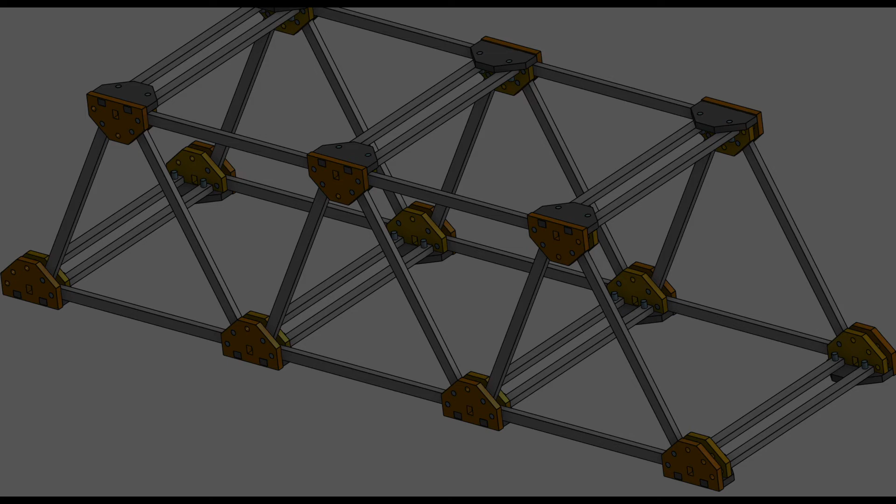In this tutorial, we're going to complete and assemble the first side of our Warren truss and put our horizontal members in as well.

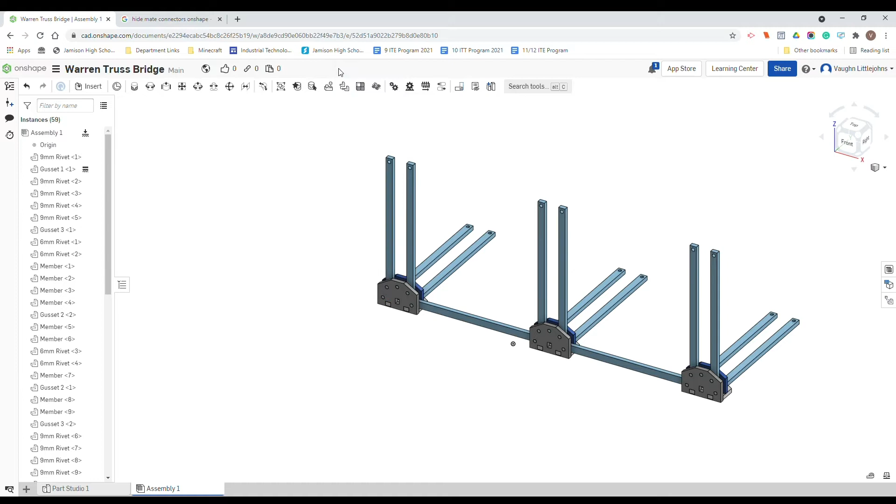So what we're going to do is hide these end pieces here, and we don't need these pieces as well, so we're just going to hide them. Remember, you can select all of them by left clicking and then right click hide.

So we're going to use this and copy it, and that's going to become the top part of our bridge. Highlight, Control C, click off it, then move my mouse up in this direction, Control V.

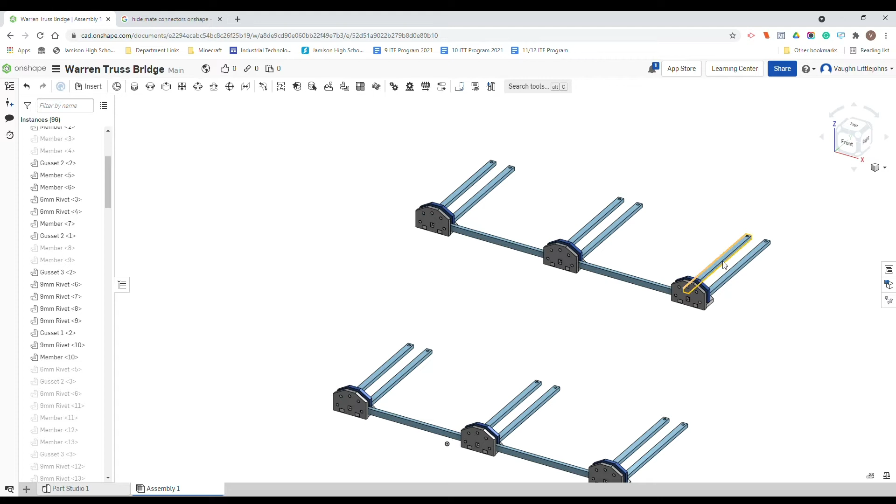So what we're going to do then is just unhide everything in a minute, but first we're just going to rotate. If we highlight our component of the bridge, we just need to flip this upside down. The easiest way is to go to the front view so you can see this, and we're just going to go to 180 degrees, and that is directly.

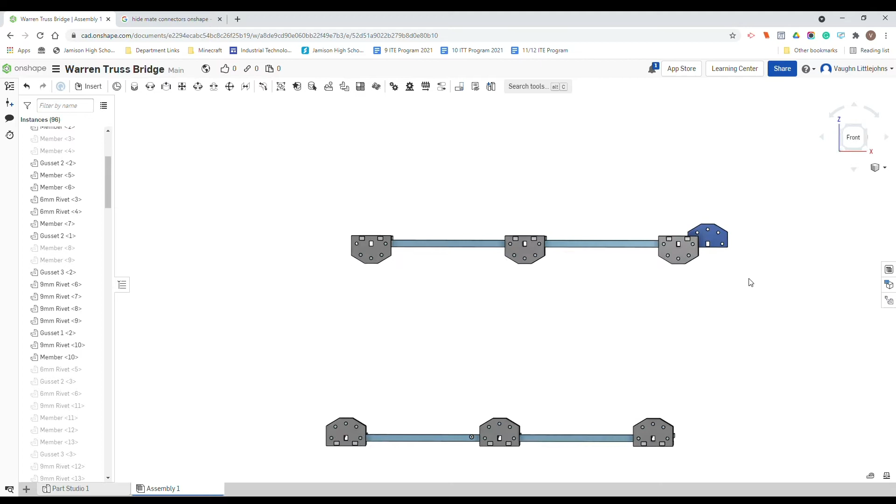Now this one has not flipped, let's have a look. That happens to you, no problem, it's an easy fix. We'll grab that one and check if there are any joints that are broken, which there isn't, meaning this piece probably isn't actually attached to anything.

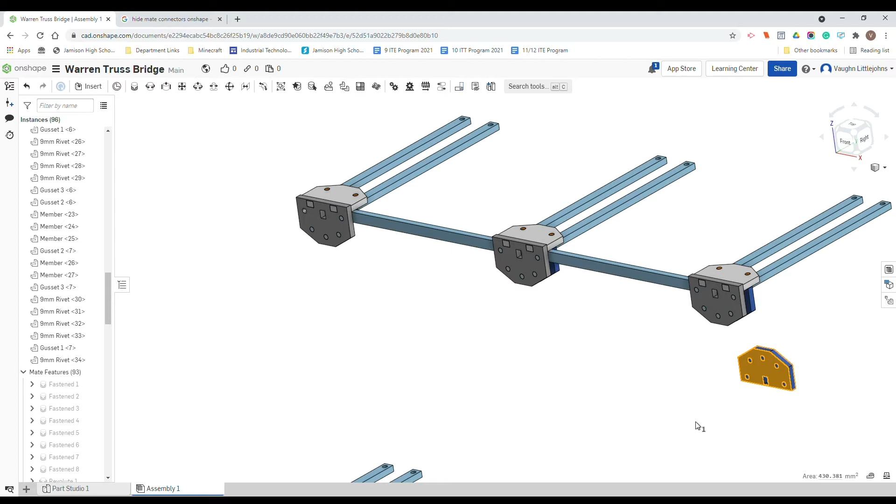So what we're going to do is the same with that, and we're actually going to fix it now. Nice and simple: click this piece, we want to flip it upside down, so 180 degrees, and then we're just going to put a fasten mate on one of these pins.

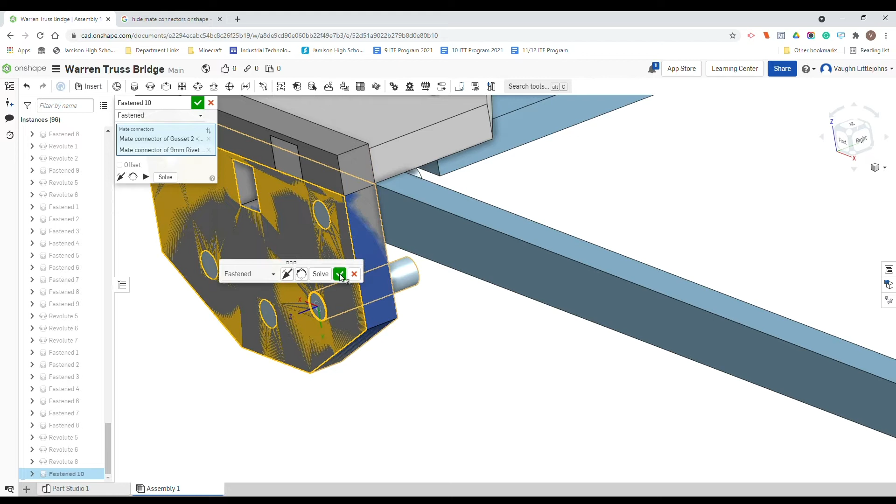And as we know, remember, we need to offset it, and because it's in this one we need to double that, so it's offset by 6. So negative 6 if it's going the wrong way. Solve and then tick.

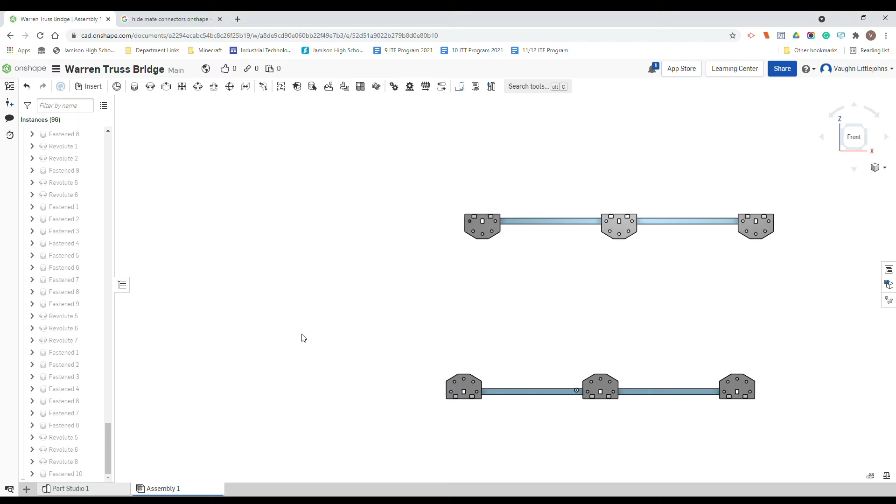So as you can see, we've just flipped that around, we've fixed it all up. Now we need to unhide our other components of the bridge, so right click, show all instances, and that'll bring up everything without all those mate indicators and connectors.

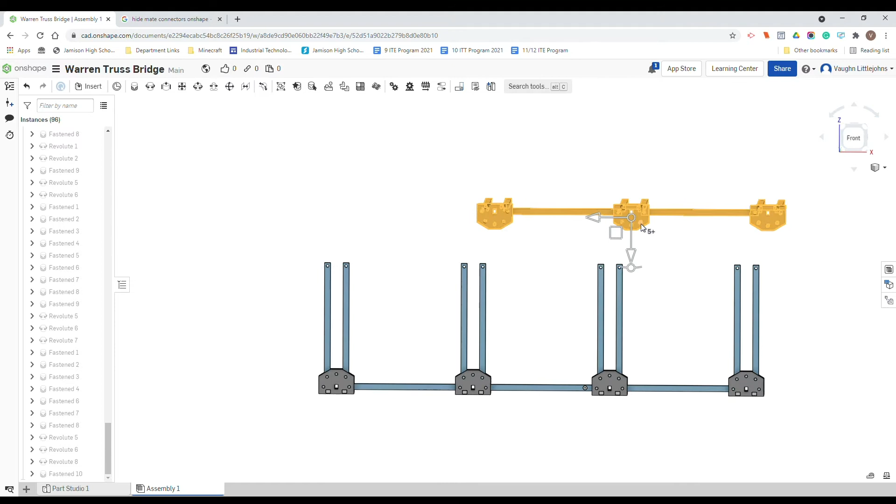Now we can basically highlight this top part of the bridge, and get it roughly where we want it. You can just grab it, and then grab the actual object, and it's going to sit roughly here.

So now we are just going to be connecting our members to our respective rivets. As you can probably tell, these outside members are no longer needed, we can just delete them, and then we can start joining this.

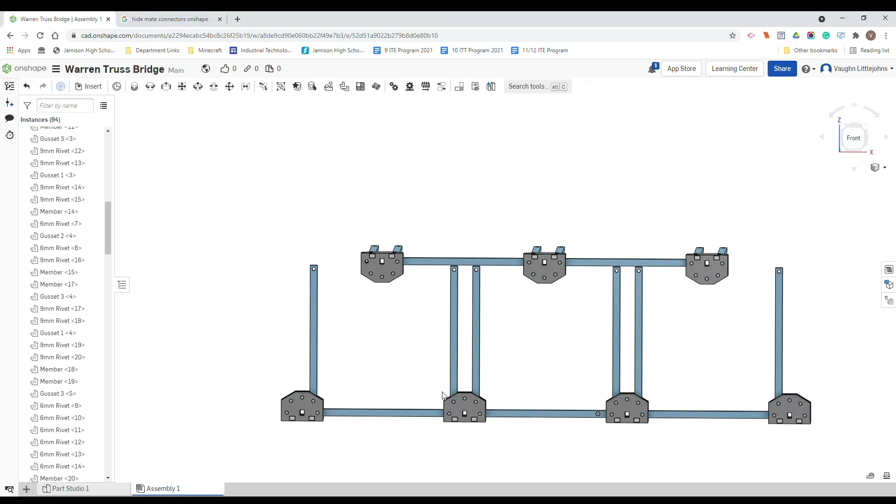Now it's the same joint, so it's a revolute joint or a revolute mate. Click that, click this. I'll zoom in a little bit so it's easier to see. Remember, we offset it by 3, on our right side, as you can tell, and we're just going to go solve.

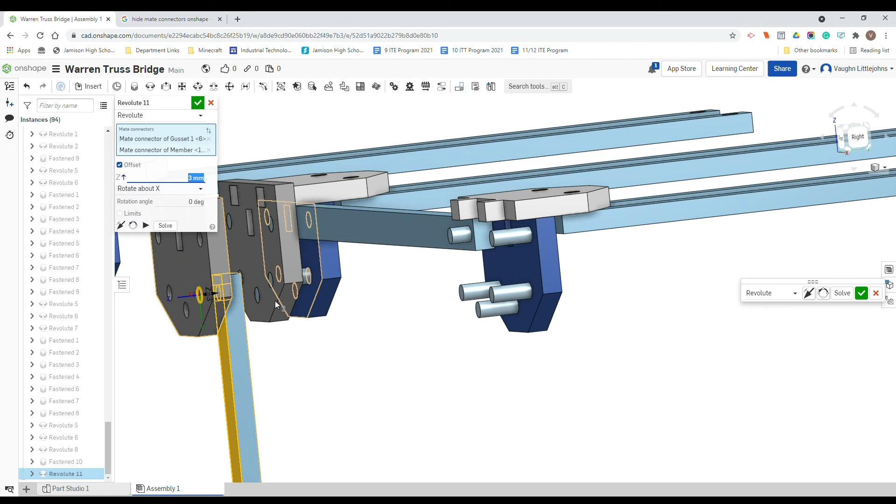Alright, before we go any further, we don't want to connect these other ones just yet. We actually need to put some constraints in. A constraint means it's a rule, so the joints won't be able to break that. So we'll look at the parallel mate. We want to actually put a parallel mate in between a few of our objects, otherwise the entire thing is just going to twist up on us.

An example of that is if I just go ahead, that's what it would do if I didn't put a parallel mate on. So we know that this piece here is fixed. First thing is we're going to actually click parallel mate, and it's just surfaces.

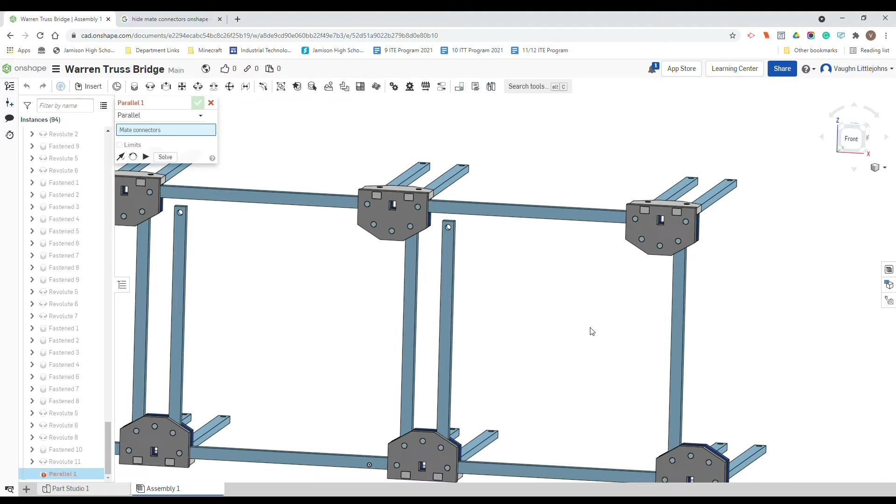So we have a look here, and we're going to put a parallel mate between this surface, rotate, and then onto this surface. Remember, just hit solve, and it'll keep all the existing mates in check, and then tick.

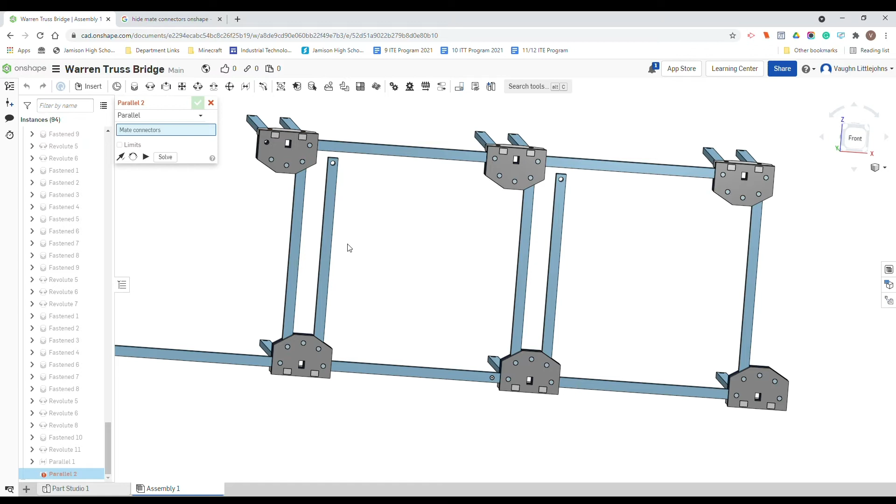Our next parallel mate will be between the top, meaning these ones are staying where they are. Now it's the top surface, so if we rotate underneath, click this surface just here on that gusset, and then the opposite side will be the top of this, just like that.

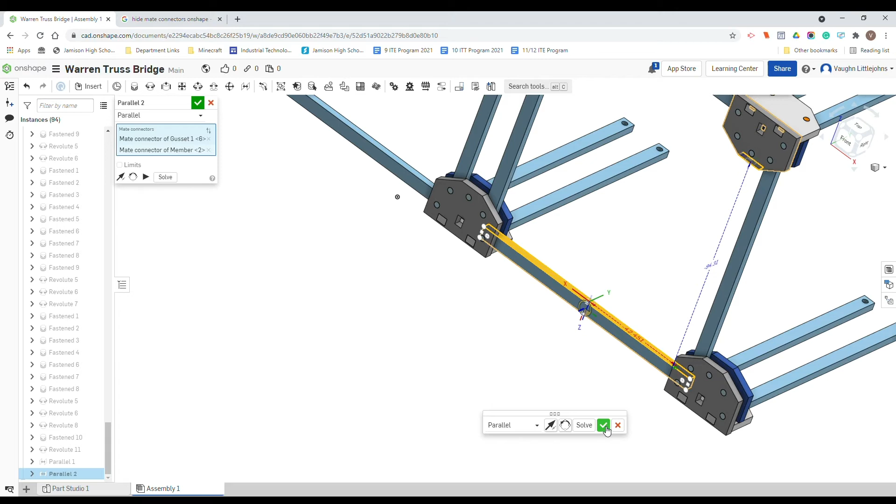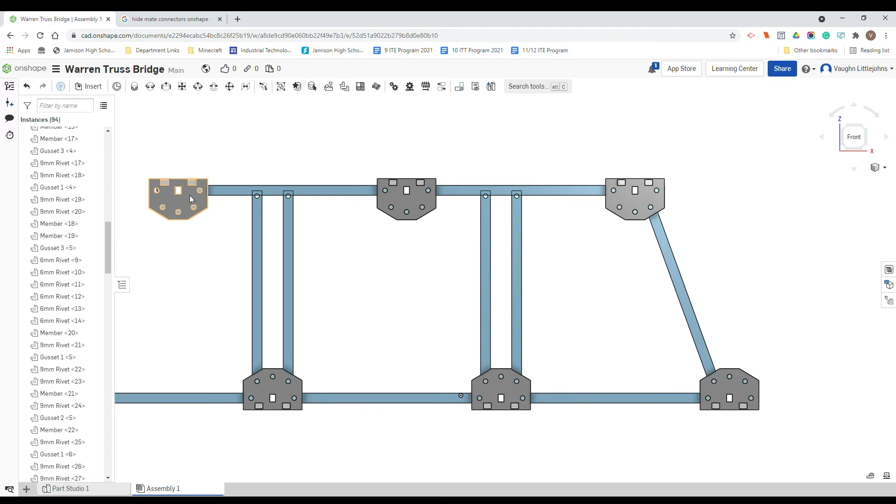When you click solve, it just stays back in its original position, tick. This means when we actually click and rotate this, everything stays where it should be. You can sort of see that our gusset 1 is parallel to that, and these gussets here haven't twisted on us. So we need to go and apply that mate to each of these gussets, that parallel mate, and then we can also attach all of our remaining members.

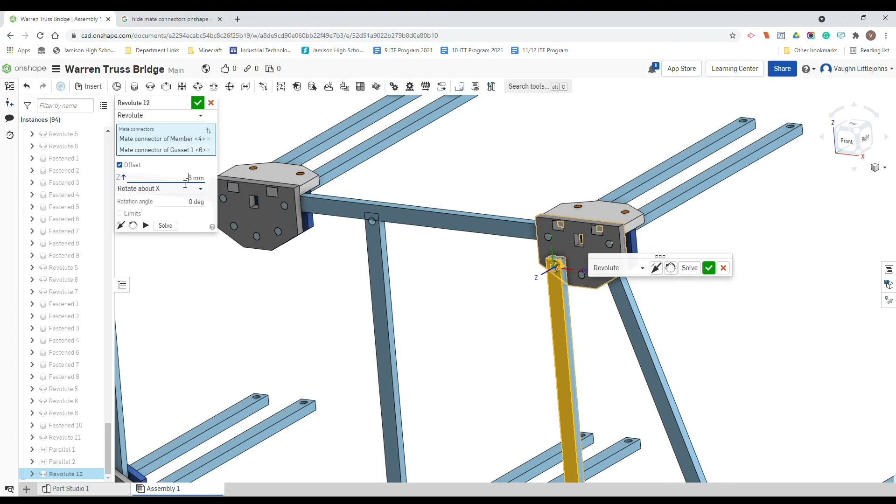So I'm just going to connect this member over here, using our Revolute mate. Now it's offset again, so 3, negative 3, solve, and tick. Now as you can see, that's our first component of our truss.

So there's our Warren truss shape, which is an equilateral triangle, nice and simple. We're just going to go and complete the rest of these, so we can attach those parallel mates and then all of our revolutes.

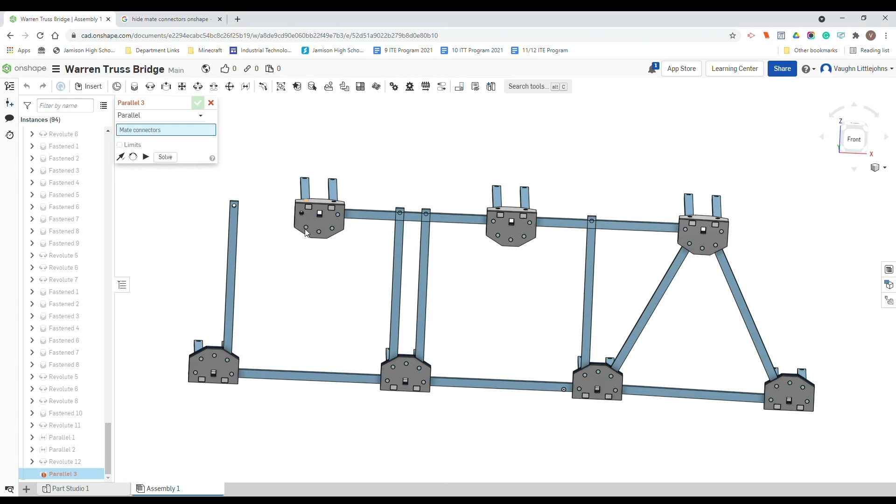So parallel mate, it doesn't matter what order or where you place them, we're just getting this approximate at the moment, but I'm just going to do it on the inside faces of our gussets to begin with. So that's one, solve, tick, and then another.

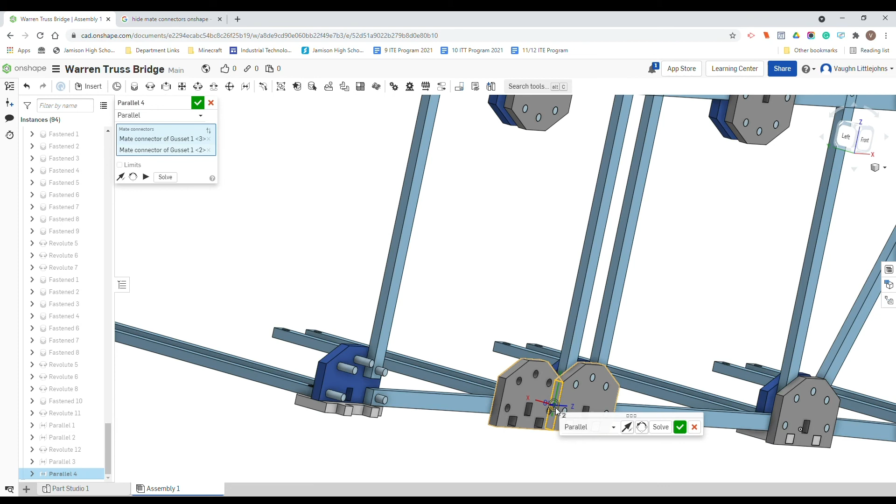Now you don't necessarily have to go on every single gusset and every single piece. The two end ones should be able to pull everything in line, but just for the sake of it, I'm going to put them on.

Alright, so then we just need to put the parallel mate with our top gusset here, that face. When it highlights yellow, that means it's selected. I'm going to zoom out, rotate. You just got to use your camera angles to get into better positions. If you've rotated too much like I have, you can just go back and click one of these, it's nice and easy to reset. Remember, you need to hit solve and then the tick button.

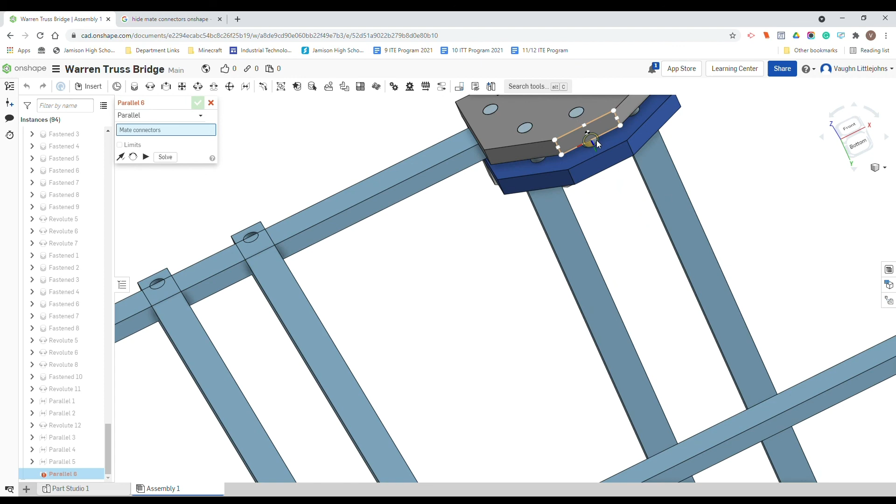And then the last one is this centerpiece, solve in a second. Alright, so that's all of our parallel mates that we need at the moment.

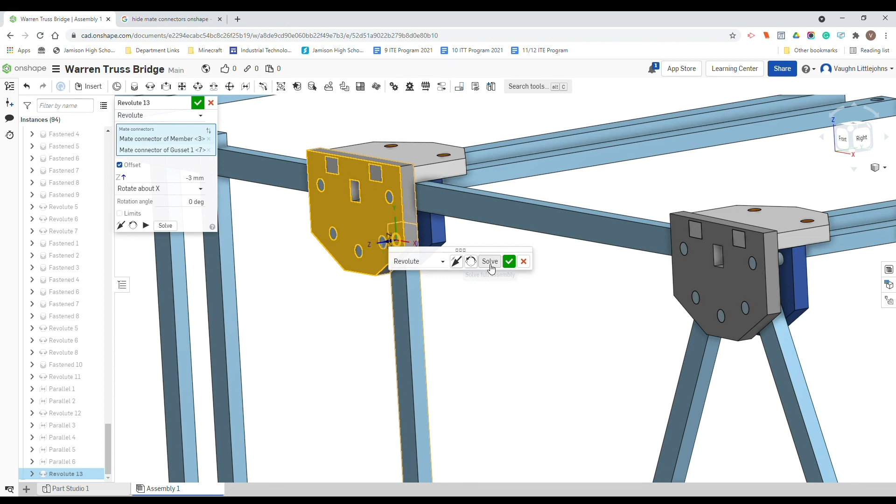So now we can just assemble the rest of the revolutes. Get a revolute, and we are going to be using this one over here, offset it negative 3, we're going to solve that, tick, and so on. Let's do the rest.

So there we have basically one half of our Warren truss. Last step is we need to duplicate this entire side and flip it on the other.